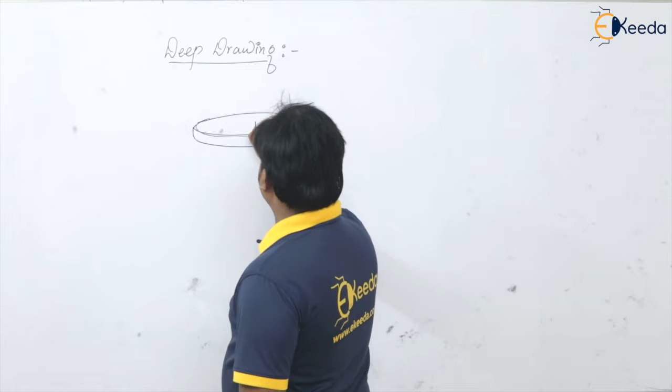It is going to use the sheet, that is the blank, and a punch and die combination to produce these cup shapes or shell like articles. So the given blank is available with us, with thickness T and diameter of the blank, say D.

This blank we are going to deform into the die, to get the cup or shell like article. Suppose we have deformed it up to this point, so you got here. Of course you are going to use the punch and die combination, so this is the punch and this is the die.

So here we are going to produce a cup or shell of diameter D and height h. So simply you can observe here, you are going to get a cup or shell like article.

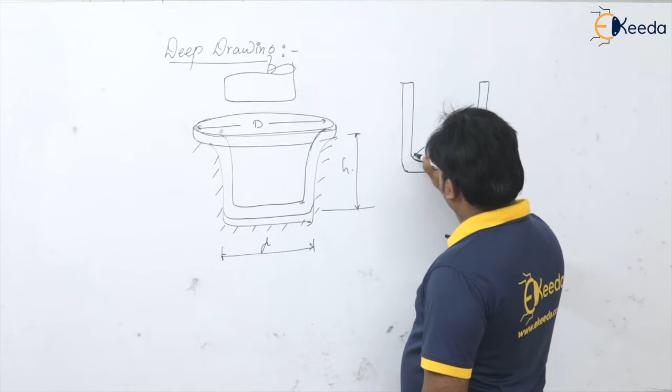Of course, this is the corner radius small r, this is the diameter that you are going to produce, and this is the height of the cup. Corner radius is put there to avoid cracks or failure at the corners because of stress concentration. So this is the cup of diameter D, with sheet thickness T in millimeters.

So this is the deep drawing operation, we are going to produce a cup. Now whenever, in the deep drawing operation, the height of the cup is more than half of the diameter of the cup. That is, h will be greater than d by 2.

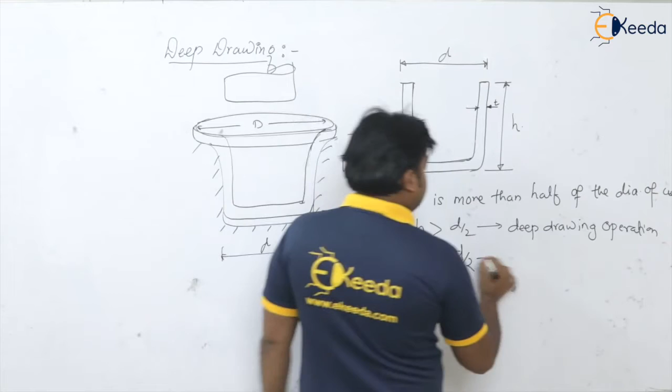When this h is greater than d by 2, it is known as the deep drawing operation. And when the obtained height of the cup is less than or equal to half of the diameter, it is called the shallow drawing operation.

So we are talking about deep drawing, so definitely the h by d ratio will be more than half, that is, the height of the cup will be more than half of the diameter of the cup. So this is the deep drawing operation.

Now this is not the cutting operation. Please remember, even though we talk about sheet metal, shearing is going to happen there, but in deep drawing operation we are not going to cut the material. So shearing is definitely not there. So what is there then?

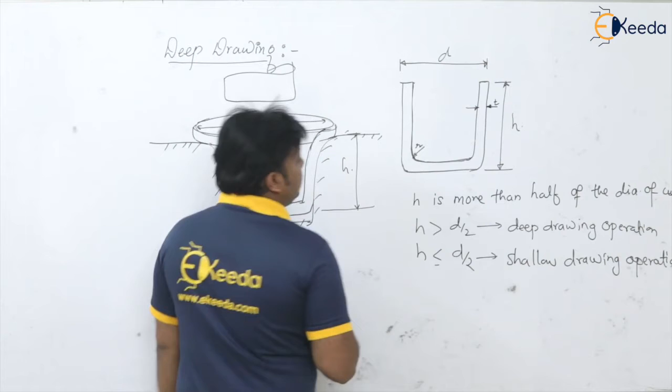The deformation, isn't it? So the stress induced in this material in the deep drawing operation is greater than the yield strength of the material but less than the ultimate strength of the material. Please remember, here we are getting deformation, not the cutting action.

Now the very important thing in this deep drawing operation for designers is to determine the size of the blank required to produce the required height and diameter of the cup. So the blank size calculation is very important, and this can be done mathematically, graphically, by using volume or surface area, to find out the blank size required to make the cup of diameter small d and height h.

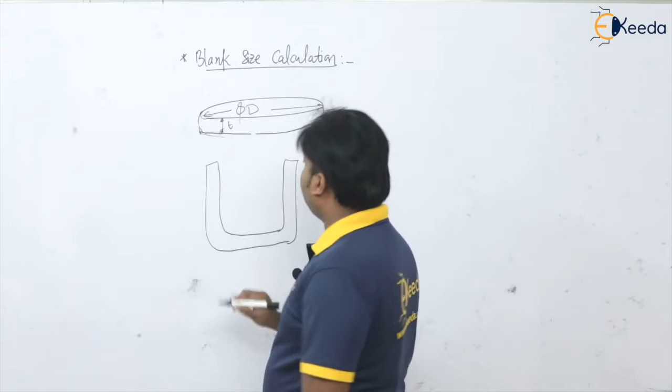So if I say that the blank which I have taken for the operation is of thickness t and diameter d, so d is the blank diameter and t is the thickness of this blank. So from this blank what are we going to produce? We are going to produce this cup of diameter d and height h.

Now for that, what can we do? There are various techniques to get this blank size, by volume, by graphical method, so many methods, but here we are using the surface area method, so that the one side surface area of the blank is equal to the one side surface area of the product, and our product is what?

We are going to get the surface area of the cup, one side. If you look from one side, it is nothing but the cross section of the blank. It looks like a circle, so that's pi by 4 capital D square, where D is our diameter of the blank. This is the very important thing we are going to find out: the blank diameter. So pi by 4 D square is equal to one side surface area of the cup.

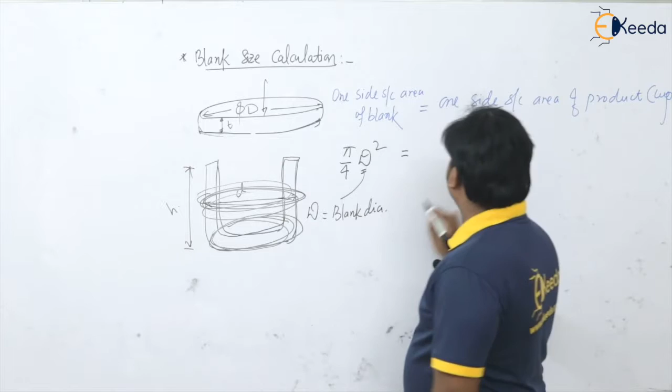One side surface area of the cup: you get the surface of the cylinder, and at the base you get the circular cross section. If you look from the top, at the base this is the circle, and this face is pi dh. So pi by 4 small d square plus pi dh is the one side surface area of the cup, and we can get the value for d.

Pi gets cancelled, 4 gets cancelled, get multiplied this side. So d square equals small d square plus 4 times small d into small h. So what is d? It is nothing but the square root of d square plus 4 times dh.

This is the formula for the blank diameter, this is the blank size we are interested in. Very important, many times this question is asked. Please remember the formula: blank size diameter is equal to root of d square plus 4dh.

Now we have to see the D by R ratio, where D is our diameter and R is the corner radius. When D by R is greater than 20, this is the formula to use.

Now when D by R ranges from 15 to 20, what do we do? We have to minus half of the corner radius from the obtained blank size, and this is the correct answer, when the D by R ratio ranges from 15 to 20.

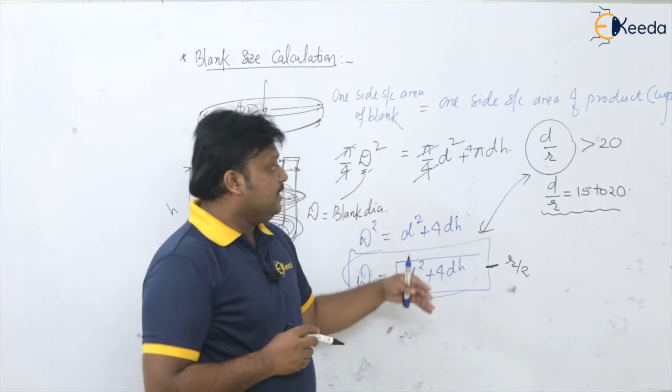Let's say the diameter is 40 millimeter and R is 0.4 millimeter. You will check the D by R ratio first. If it is more than 20, you simply use this formula. If D by R ratio ranges from 15 to 20, you minus half of the corner radius from this, and you will get the correct value.

Now when D by R is from 10 to 15, what you will do is minus the corner radius from this D square plus 4DH. Please remember, you will directly minus the corner radius to get the correct answer.

Now what happens if D by R ratio is less than 10? In that case, you can simply go for total surface area of the product and total surface area of the blank. We had taken only one side surface area before, but now you equate the total surface area of the blank to the total surface area of the product or cup, and you will be able to find out the value for D.

Please remember these three conditions: D by R greater than 20, D by R in the range of 15 to 20, and D by R in the range of 10 to 15. This formula for blank size is very important.

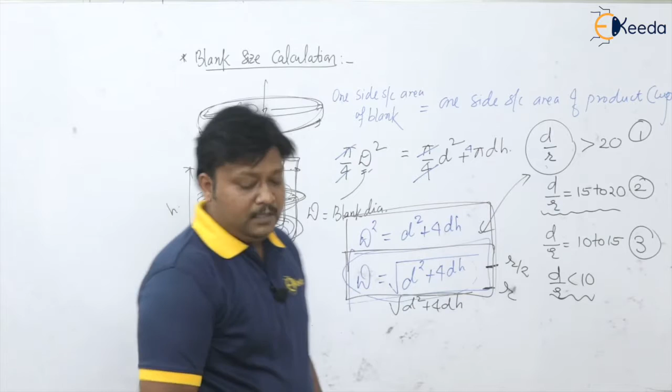So for this cup, calculate the blank size. We know that one side surface area of the blank is equal to one side surface area of the cup. So one side surface area of blank is always available like this, with diameter D and thickness T.

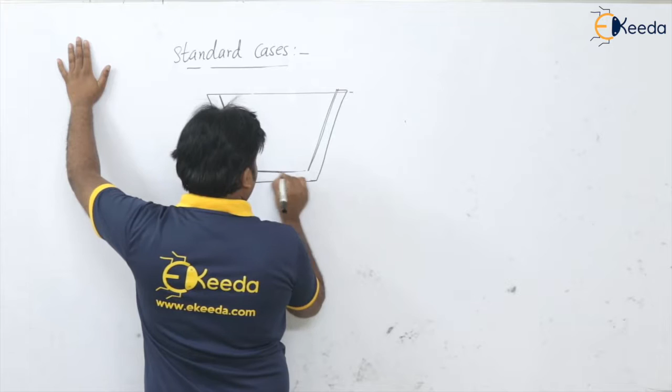Say this is H, this is D1 and this is D2. V-shaped cup. V-shaped cup is going to be analyzed here for the blank size calculation. So sometimes this H, or sometimes this angle theta, is given to you, this angle theta. You can get the value for H here.

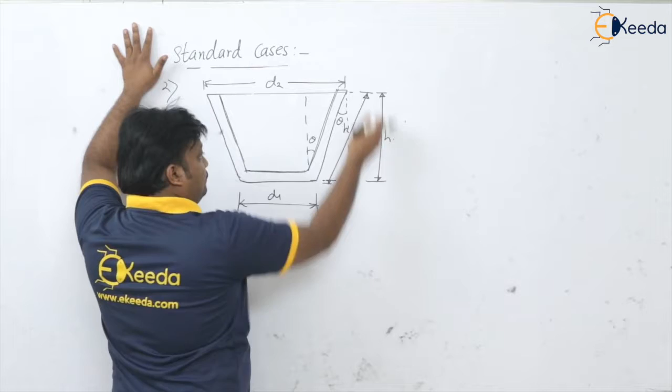So it is not necessary that there should be this H or that H. Whatever height is given to you, you can take the height there. No issue. If slant height is given, take it as slant height. If angle is given, calculate the height. You will have no issue for that. Actually, you can take any.

So here, what is the blank size? One side surface area of blank is pi by 4 d square. For this, at the bottom it is circular, so pi by 4 d1 square plus here pi d average into h. Pi d average into h, please remember this. So this pi by 4 d1 square plus pi times d average, what is that? This is d1 plus d2 divided by 2, into h.

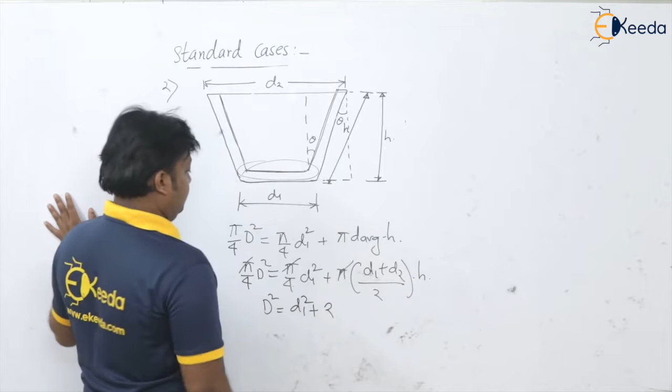This is a slant height or this height, any height you can directly take, no issue. So this is pi by 4 d square. Pi gets cancelled, 4 comes here. So it will be d square is equal to d1 square plus 2 times, 4 comes here, this 4 by 2 is 2, times d1 plus d2 into h. So what is d? It is equal to root of d1 square plus 2 times d1 plus d2 into h.

So this is the diameter of the blank for producing this V-shaped cup. Again, if corner radius is given, then only you can go for the consideration that I already told you. If not, no issue.

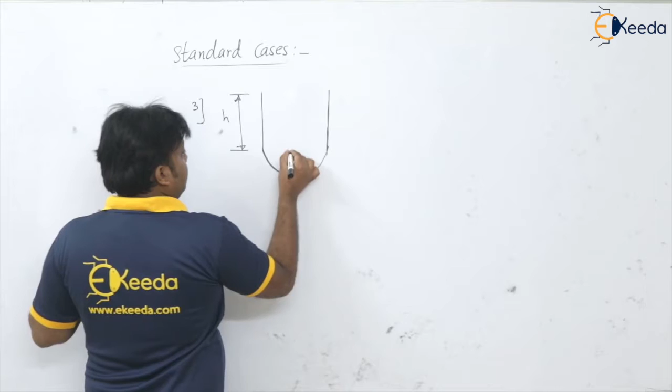Now take the third case, after this V-shaped cup, that is we are having the cup having the hemisphere at the bottom, or the spherical shape at the bottom. So say this is the height h, this is nothing but say r, which is equal to d by 2. For this shaped cup, if you want to find out the blank size, how will you find out?

The one side surface area of the blank, pi by 4 d square, is equal to one side pi d h plus at the sphere, that is half spherical. So what is half spherical surface area? That is 2 times, or 4 pi r square divided by 2. This is nothing but pi d h plus 2 pi, this r can be written as d square by, r is d by 2, that is 4. So we'll get pi d h plus pi d square by 2, that is equal to pi by 4 d square.

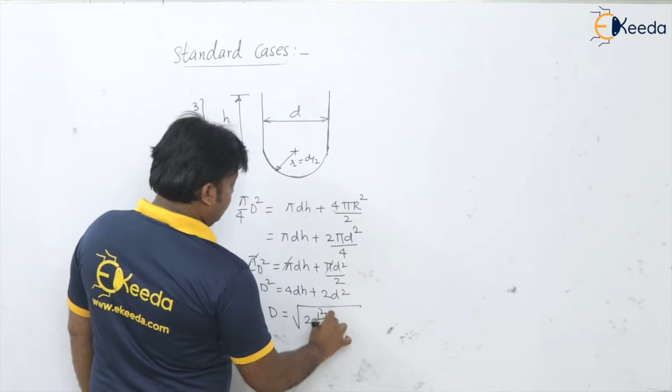So pi gets cancelled, so d square is equal to 4dh plus 2d square. So d is equal to under root of 2d square plus 4dh. Here no need of having this d by r ratio, as this is a radius, spherical shape is there, so no need of any corner radius. So the blank size you are getting in case of the spherical bottom of the cup is d equal to under root of 2d square plus 4d into h.

Now if I take the fourth case, as the hemispherical cup is there, say of radius r, or you can have the diameter d.

Okay, so how can you calculate the blank size for the given cup? Please try: one side surface area of the blank from where it's going to be produced is pi by 4 d square, that is common. It is nothing but one side surface area of the sphere, which is 4 pi r square divided by 2.

That is 2 pi r square, equal to pi by 4 d square. Pi gets cancelled, so d square is equal to 4 into 2, that's 8 r square. So d is equal to under root of 8 r. So root 8, how can you write? This is 4 multiplied by 2 into r, which is equal to 2 root 2 times r, that is the size of the blank for producing this hemispherical cup.

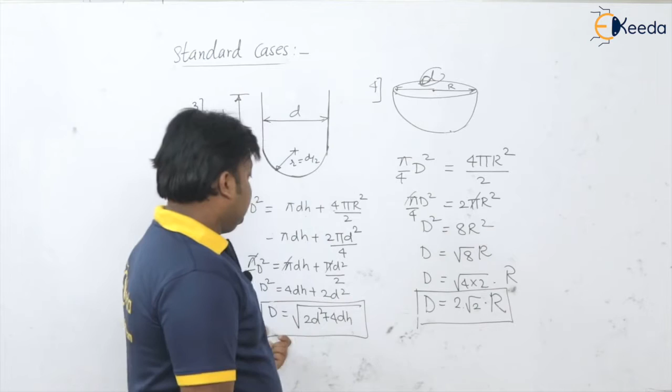So you just have to equate the one side surface area of the blank with the one side surface area of the product or cup. This is a very important thing in the deep drawing operation, the blank size calculation. Many times they ask questions on this blank size calculation.

Now students, let us find out the load or force calculation in the deep drawing operation. Basically in deep drawing we use the punch and die combination for doing this operation. Talking about the clearance between punch and die, since no cutting or shearing happens here, we provide the clearance equal to the thickness of the sheet. So that's the clearance.

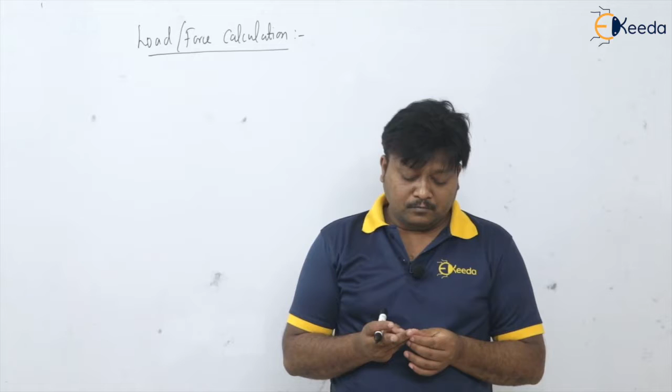Now talking about the loads in deep drawing, it is always better to do this operation in a number of stages. Why is that so? Suppose you go for only a single pass deep drawing operation, the average stresses induced are just equal to the ultimate strength of the material, and there's a strong chance that at certain critical sections cracking or failure will occur. That's why we always try to have the deep drawing operation in a number of stages, also called draws, strokes, or blows. You can use any word: stroke, blow, draw, step, pass.

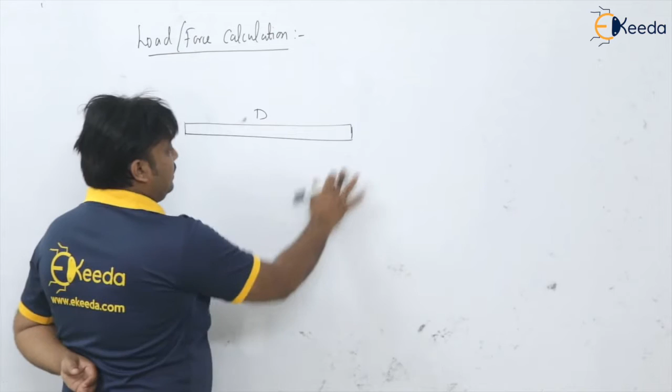Suppose this is the original blank with diameter d, undergoing deformation to form a cup. Say the blank diameter is 120 millimeter, and from that I need to produce a cup of diameter say 40 mm, whatever the height. But I'm not going to have this 120 millimeter blank directly converted into the 40 mm cup diameter. So how can I achieve that? I will have a number of passes for that.

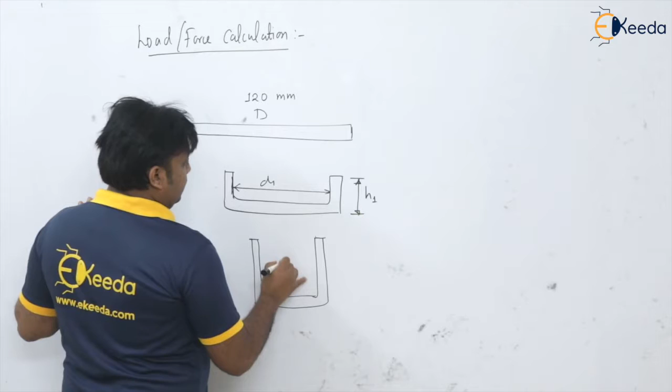So say first pass, I will go for this much reduction in the diameter, and at the first draw my diameter is d1, and the height achieved is h1. Now again I will have the subsequent reductions, the diameter further reduces and the height increases. So this is diameter d2, and the height in this pass is h2.

So every time what I am checking is whether the obtained diameter is less than or equal to the required one. Once it becomes equal to the required diameter, I will stop the reduction. So in a number of stages, say pass 1, pass 2, pass 3, I get the required height or diameter less than or equal to the required one. Say at the third stage I got the required height h and the required diameter for the cup.

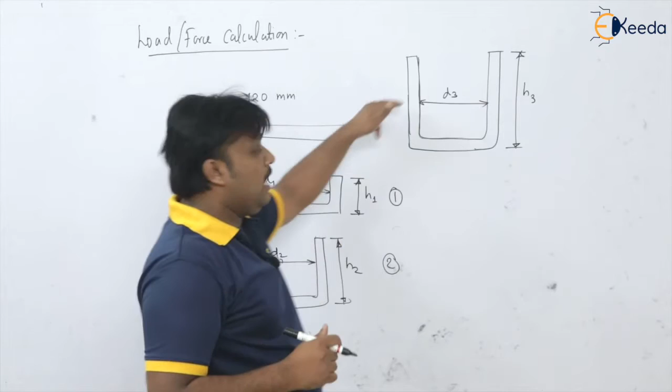So like that we are going to have a number of passes, and the force is also going to be calculated in the number of stages. But let us see how to calculate this force for the deep drawing operation.

It is simple: the cross sectional area multiplied by the yield strength of the material. We get the force, indicated by P, in the deep drawing operation as P equals pi d t sigma y, times bracket (capital D upon small d) minus C, in Newtons.

Here small d is the diameter that you want for the cup. Suppose this is a cup, I want this diameter d and height h from a given blank. So d is this diameter, small d is the diameter that is required, capital D is our blank size. Do you know how to calculate this blank size? The general equation is square root of (d squared plus 4 d h).

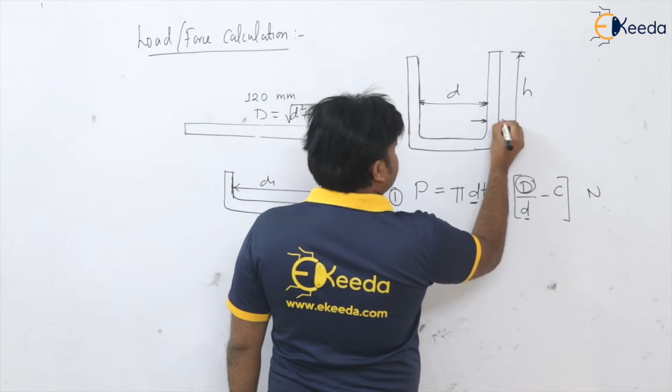So this is how we can write the load formula for the deep drawing operation, where T is the thickness of the sheet, and sigma y is the yield strength of the material. Please remember this is the yield strength. And what is C? This is the constant to cover the friction and bending of the sheet, generally equal to 0.6 to 0.7.

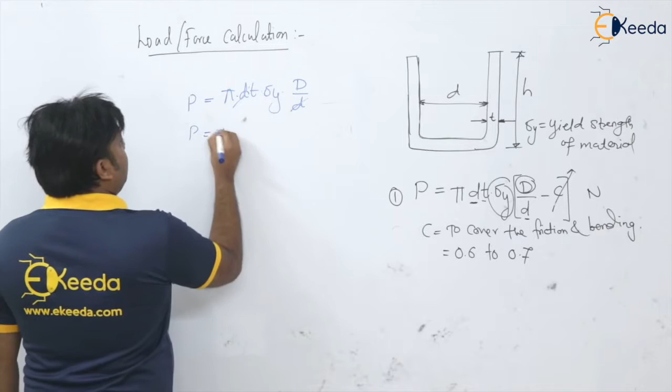Suppose it is not given in the question, you directly neglect it. So what are you remaining with? If C is neglected, you have P equals pi into D into T into sigma y into capital D divided by small d. Now D gets cancelled, so P equals pi d t sigma y, in Newtons. So this is the force in the deep drawing operation.

Now what we discussed is that we never work in a single stroke, so we go for stage-wise operation. So the force will also be stage-wise. Let us say I want to do the operation in a number of strokes.

So definitely for the first stroke or first pass, what will be the force? I can write P1 equals pi d1 (the first draw's diameter) into T into sigma y into bracket (the blank size, which is initially in our hand) divided by the first stage's diameter d1. I am not considering C, it is neglected. So the force in the first stage: d1 gets cancelled, and you get pi capital D T into sigma y.

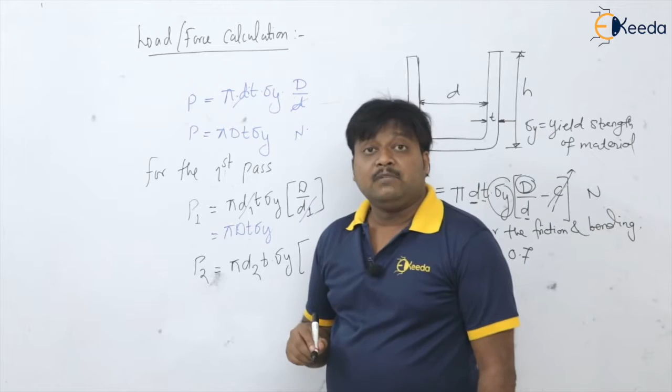Like that, if you want to find the force for the second stage or second pass, which diameter are you getting? Second stage's d2, T times sigma y. Now which diameter are you drawing from? Capital D is no more available; you are available with the first stage's diameter, and this is what you are going to deform further. So this is d1 divided by the second stage's d2, which will be achieved. So d2 gets cancelled, and you are left with pi d1 t sigma y.

Like that, for P3, what will come? Pi, so here d1 came, here what will come? Pi d2 t times sigma. Like that you can go on calculating the force for every stroke, every stage in the deep drawing operation. Please remember this.

Once you are calculating the force, then the work done calculation is much easier. How to calculate the work done? You know work done is force into distance.

So if I ask you to find out the work done at the first stage, first stroke, first pass, how would you do it? It is force into distance. So what is the force of the first draw? P1 into the height of the first draw, H1. So P1 into H1 gives you the work done in the first stage, in Newton meter.

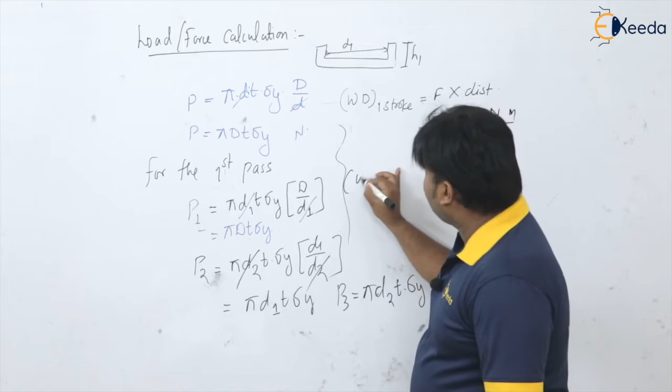Please remember, if I ask you to calculate the work done in the second stage and second stroke, what will it be? In the second stroke, the diameter converts to D2, isn't it? Diameter will be D2 now and height will be H2. So what is the force? P2. Work done equals force into distance. So distance is H2 minus H1. Like that, for the third stage we have P3 into H3 minus H2.

So you can go on calculating the work done also in a number of stages. Okay, so what we see here in the deep drawing operation is force calculation and work done calculation.

Okay, so dear students, after talking about the force or load in the deep drawing operation, now let us discuss about the blank holding force. So basically this blank holding force depends upon the tendency of the sheet or plate to get lifted.

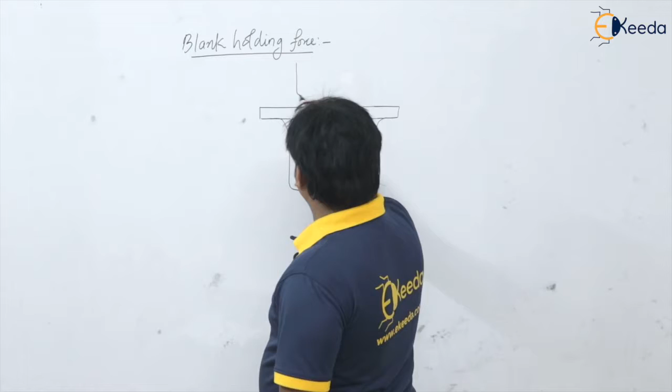So when the force is applied by the punch on the sheet, what happens? The sheet tries to lift in the upward direction. So this is the sheet, and this is our die. When the force is applied by this punch, what is going to happen? This sheet is going to lift in the upward direction, and this will lead to the wrinkling tendency.

Wrinkling tendency - actually what is wrinkling? Wrinkling is nothing but the foldings produced on the flange portion of the cup, like this. So your cup will look like this. So this is actually wrinkling - the foldings on the flange portion of the cup. These are the wrinkles, and this tendency is called wrinkling tendency.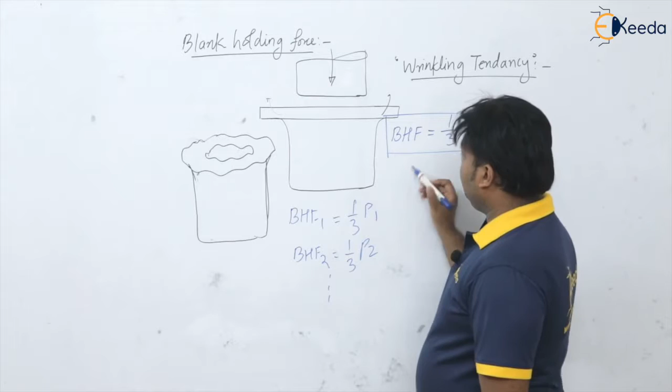Now to avoid this lifting of the plate or sheet, we use the blank holding force - these are spring loaded plates we put here. These are called strippers. They apply this force onto the plate so that the lifting can be avoided. So by using the spring loaded stripper, these are used to apply the blank holding force.

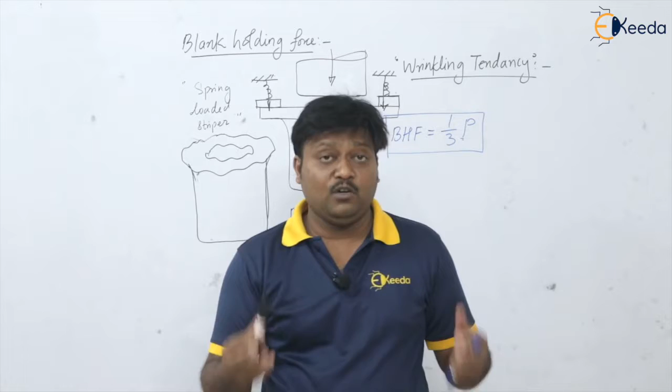Now see, if the blank holding force gets maximum, what will happen? Why is it only 1/3 of the load in the deep drawing operation? Definitely if you apply the maximum blank holding force, the thinning of the sheet may happen. And if it is more, it can lead to failure or fracture. That is the reason why we keep this blank holding force in limit, providing only 1/3 of the load in the deep drawing operation. Otherwise thinning will occur and the sheet is going to fail. Okay, so this is the blank holding force.

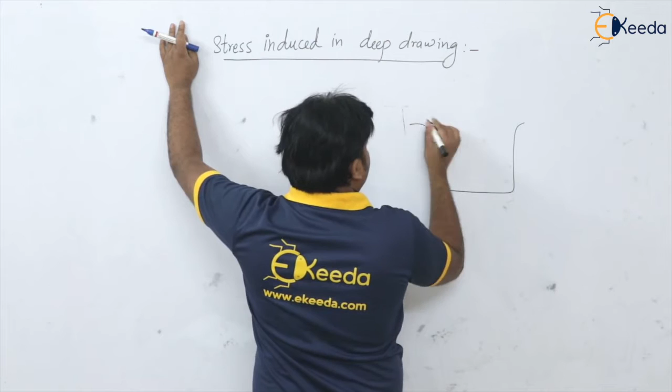Now let us consider the stress induced in the deep drawing operation. So now we have calculated the force. Now how to calculate the stress - and of course the stress can also be calculated in every stroke. So let us say our cup is forming here by the force from this punch, and you know that in the deep drawing operation, the clearance between the punch and die is equal to the thickness of the sheet. This is nothing but the clearance. So once you see from the top, how will it look? If this is the punch diameter, isn't it?

Say this is the outer diameter, that is including the thickness T on each side. If D is the diameter, this is the height of the cup being produced in this die. So the inner diameter will be D minus 2T, since thickness T is removed from each side, and outer diameter is D. So outer diameter here is equal to capital small d, and inner diameter will be D minus 2T.

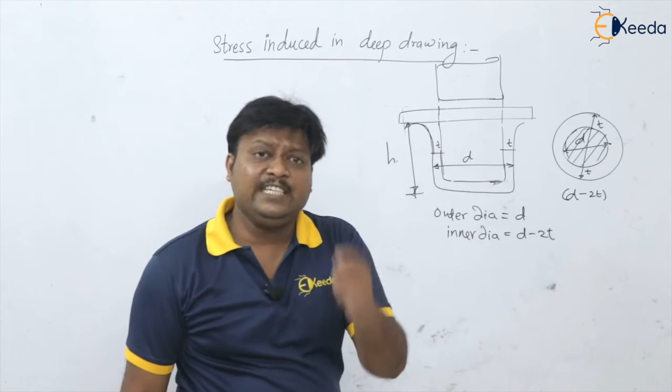Now if you want to find the stress induced in the first pass or first stage, say sigma 1 is the stress induced in the first stage. Sigma is equal to P1 divided by the area in the first stage. We know P1 is calculated as pi d t into sigma y. So sigma 1 equals P1 divided by the area, which is pi by 4 into d1 square minus the inside area, d1 minus 2t whole square.

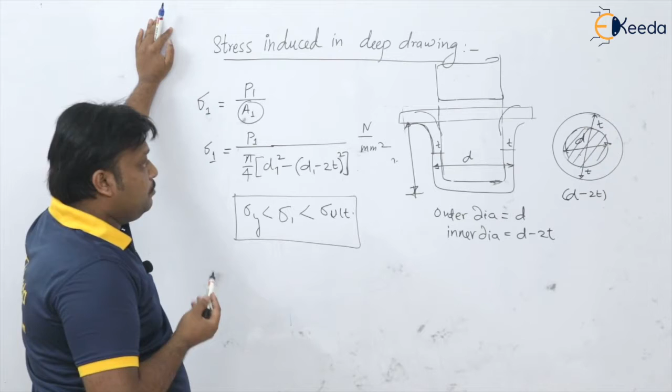So you get this stress in Newton per mm square for the first case. One very important thing is that deformation happens when sigma 1 is greater than the yield strength of the material, and of course less than the ultimate strength of the material. Remember this, because deep drawing is a deformation process where the size and shape is obtained through deformation.

So similarly you can have sigma 2. This is P2 divided by pi by 4 into d2 square minus d2 minus 2t whole square. Like that you will get the stress in the second stage, and you can go on calculating the stress in the respective stage or stroke very easily. So this is the induced stress calculation in the deep drawing operation.

Now in this stress analysis, suppose we have a partially drawn cup. Partially drawn means the process is currently running, and I want the stresses induced in a partially drawn cup. Let us see this. For that I have to draw the partially drawn cup.

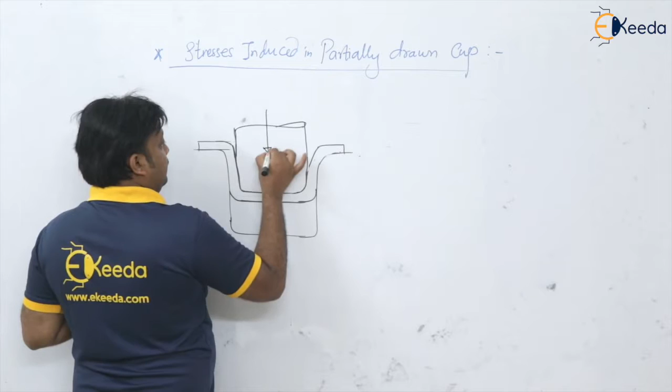Say this is the die, and this is the flange portion on which our blank is rested now. It is partially drawn, that's why I will show it like this, that the operation is in process, and it is applying force P. This is the die, in which the process is progressing for making a cup from a given blank. So this is a partially drawn cup.

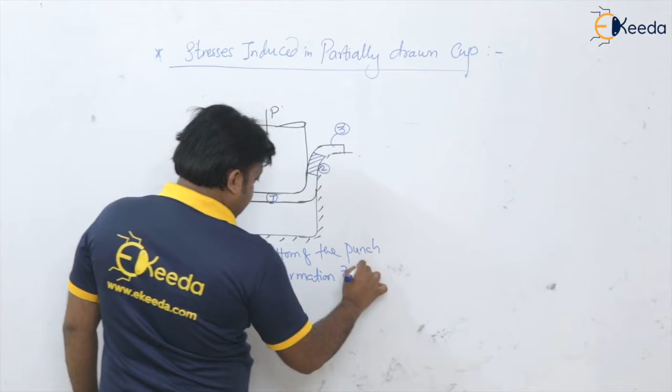So here we are having three zones. This is zone number 1, and for deformation, this is zone number 2, and the flange portion, this is the third zone. So zone number 1 is the bottom of the punch. Zone number 2 is the deformation zone. And zone 3 is the flange portion.

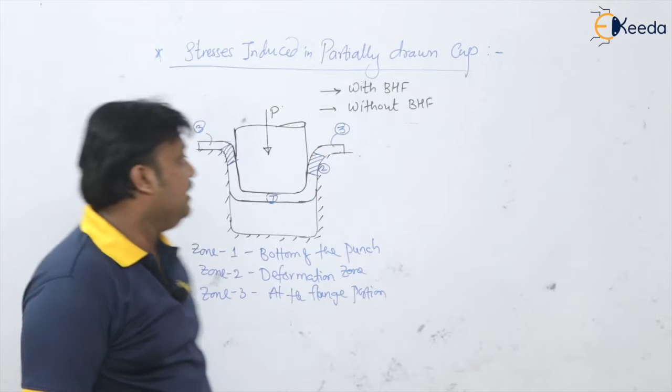So what we are going to see is the stresses induced in these three zones in the partially drawn cup, and very importantly, by considering two conditions: one with BHF and one without BHF. So for these two conditions, we are going to see in each zone what kind of stresses are going to induce in the partially drawn cup. This is very important - many questions are framed on this subtopic, stresses induced in partially drawn cup.

So let us see, we have the first zone - which zone is it? Bottom of the punch. So tell me which kind of stresses are going to induce, here with BHF and without BHF. Okay, so that we are going to see.

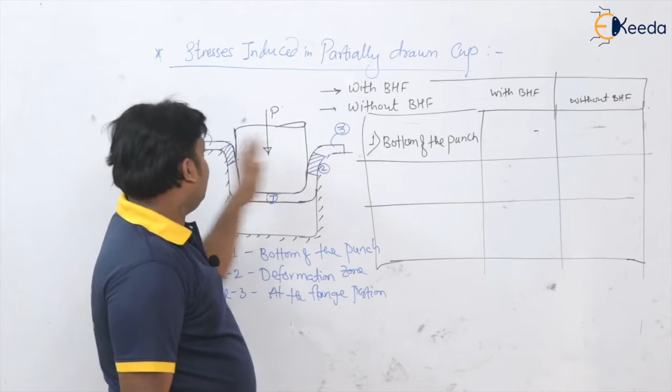Now see at the bottom of the punch. If you are not applying any blank holding force (BHF), the punch is simply taking the sheet down into the die. So actually there are no stresses.

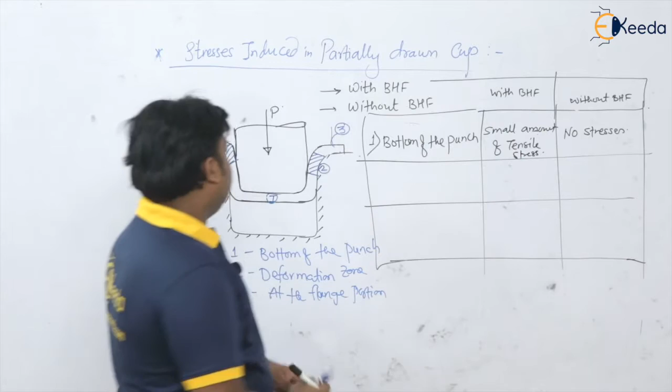Without BHF, at the bottom of the punch there are no stresses. Even if you apply the blank holding force on the flange, there will be stresses, but a very small amount of tensile stress only. So with BHF, a little amount of tensile stress will be at the bottom of the punch.

Now come to the second zone, the deformation zone. The force or stress induced in this zone is responsible for the change in shape, and it is responsible for deformation. So in this deformation zone, the shape is going to change.

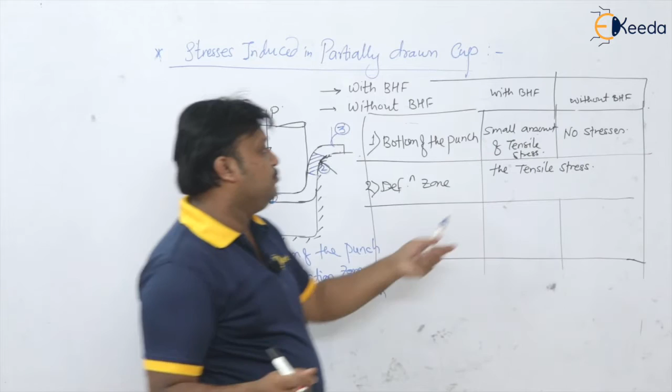That's why with or without BHF, there is no issue. What kind of stress will be there? With or without BHF, pure tensile stress only. However, if you look at the corners, there is a compressive stress, but it is very small in amount compared to the pure tensile, so we are neglecting it.

So here I write in brackets: at corners, compressive stress is there, but negligible, so that's why I am neglecting it. So pure tensile actually in the deformation zone. Please remember, this is very important: in the second zone, whether you apply BHF or not, there will always be pure tensile stress produced.

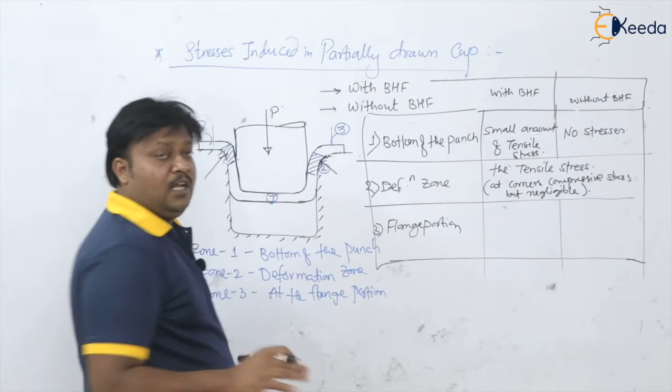Now come to the flange portion. When you are not having BHF at the flange portion, versus when you are having BHF, what is the material going to have? Deformation, because of the tensile stress. So only tensile, with the BHF, tensile stress only.

But without BHF, what is going to happen? There is a flow of material radially, and they are going to produce foldings, they are going to produce wrinkles. So if you look at the kind of stresses induced at this third zone, the flange portion, these are two directional tensile and compressive in the third direction.

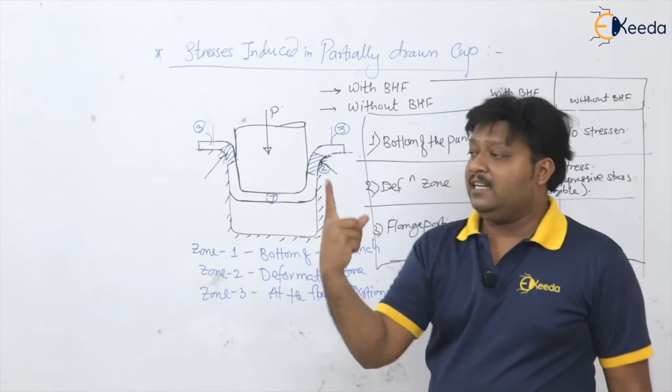So with BHF, only the tensile stresses are generated in the flange portion as material flows inside the die. But if you are not using any BHF, it will simply be lifted outwards. So: two directional tensile stress and compressive in the third direction.

So these are the kinds of stresses which are produced in the partially drawn cup in various zones: the bottom of the punch, the deformation zone, and the flange portion. So this is about the stresses.

Now in this video we are going to see the number of draws, the number of passes, and the calculation for this. Many times I use the words pass, draw, blow, stroke - these all mean redraws. So how to calculate this? Let us see the number of draws in deep drawing operation.

For calculating the number of draws, there are two techniques. Technique number one is the draw ratio method - very easy. What is the draw ratio method? The draw ratio is equal to the diameter before drawing divided by the diameter after drawing.

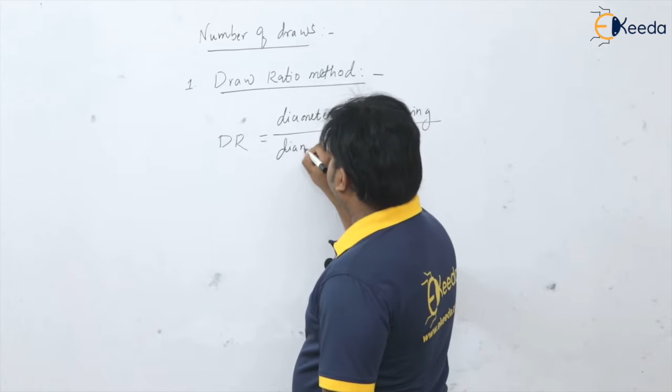Let us say if I want the draw ratio for the first draw. When we start the operation, what do we have? We have the blank, the blank size. Using that blank, we are going to produce the cup. So before drawing we have capital D, the blank diameter, and after drawing we get the cup diameter. So simply, the ratio of diameter before drawing divided by diameter after drawing.

So here D will be replaced by D1 because this is the first draw. Now this draw ratio actually ranges from 1.6 to 2.3. Please remember, these are the limiting draw ratios, LDR - limiting draw ratio ranges from 1.6 to 2.3.

If in the question they are asking for the calculation of number of draws and they have not mentioned anything about the draw ratio or limiting draw ratio, you just simply consider the draw ratio is equal to 2. Please remember this, it's very important - whenever no data is given for the draw ratio, you can take it as 2.

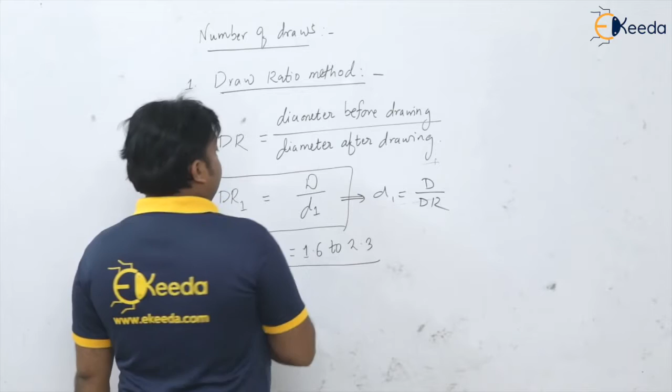So like that you go on calculating the number of draws to get the required size of cup. Say the diameter you get from this first draw, D1, is equal to D divided by the draw ratio. But still it is greater than the required diameter, the required cup diameter.

So for the next draw, for the subsequent draw, you will get D2 equal to D1 divided by the draw ratio. If the same draw ratio is used in every stage, this dr will be same everywhere. If the draw ratio changes at particular stages, you'll have dr2. If this is greater than the required diameter, you go for the third draw, that is d2 divided by draw ratio at the third stage. Once it is less than or equal to the required diameter, you stop there. So there will be 3 stages, and the deep drawing operation can be done in these 3 stages. Like that we can find out the number of draws.

Let me take one example. Suppose a cup of diameter 15 mm is required and height of the cup required is 60 mm. The question is to calculate the number of draws required to do this drawing operation. First of all we require the blank size, which is very important. Blank size is simply under root d square plus 4dh.

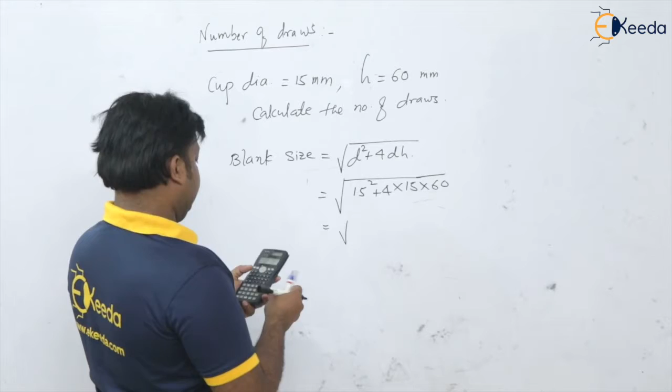So diameter of the cup is 15, so 15 square plus 4 times 15 times 60. If we solve it, 60 square plus 225, under root, the answer is around 61.84 millimeter. So this is the available blank size with you, and this blank size you are going to draw into the required cup diameter and height.

Here nothing is mentioned about draw ratio, so simply we can take it as draw ratio. How much are we going to take? It is 2. So let us write the draw ratio equal to the diameter before drawing, that is d divided by d1. So d1 will be 61.84 divided by the draw ratio, which is 2. So d1 will be 61.84 divided by 2, that is 30.92.

What diameter do you need? 15 millimeter. What did we get in the first stage? 30.9, which is greater than 15. So again you have to go for the second pass.

What will you get in the second pass? This 30.92 divided by 2. How much is it? Divided by 2, it is 15.46, which is again greater than 15.

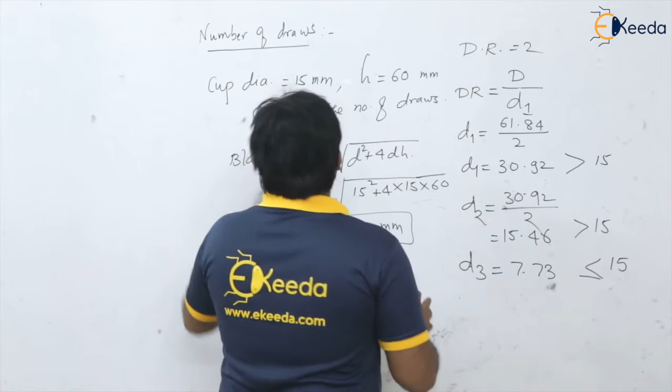So how many stages, or how many draws, are required? The question was the same: calculate the number of draws. Draw number 1, this is the second, and in the third draw the operation gets complete. You reach the 15 mm diameter. So the answer is 3 draws. How many draws were needed? 3 draws were needed. Like that you have to solve the questions.

Now the other technique to calculate the number of draws is the draw reduction ratio technique or method, known as DRR. So how to calculate DRR? DRR is equal to D minus d divided by capital D into 100. So the initial diameter minus the diameter in the respective stage, divided by the initial or original diameter, gives you the draw reduction ratio. Very simple. This is like a percentage reduction.

So if I want to write for DRR1, the draw reduction ratio, it will be D minus D1 divided by D, where D is the blank size and D1 is the diameter I am going to get in the first stage, into 100, so it is in percentage. The draw reduction ratio in the first stage is about 45 to 50%. Please remember this. So definitely how much draw ratio can you get in the first stage? 45 to 50%. That is the draw reduction ratio we are getting here.

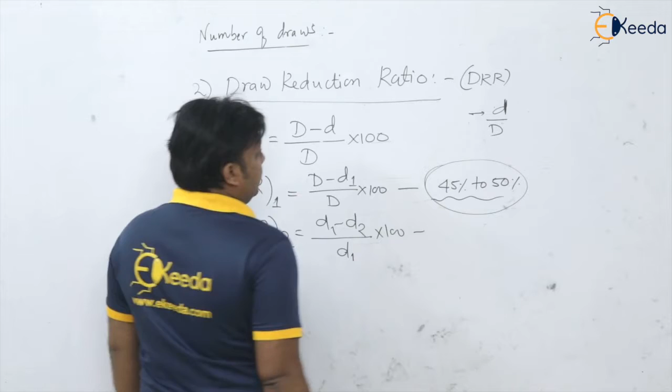Suppose directly from the given data you have the value of capital small d, that is the required diameter, divided by blank diameter. If this ratio is more than say 50%, you have to go for this reduction technique in the number of stages. So for the first reduction you get about 45 to 50%. Similarly, the draw reduction ratio in the second draw is available diameter D1 minus diameter D2, divided by D1 into 100. Here you get 30 to 35% reduction in the second draw.

Now when you go for the third or fourth draw, it is very important to remove the material and enhance the ductility by the annealing operation, so that you can get further deformation and reduction in the deep drawing operation. Before doing the third or fourth draw, you have to enhance the ductility so it can be easily drawn by the annealing process. This is not so important, but for your information I am telling this.

So for the third draw, it is D2 minus D3 divided by D2 into 100, giving around 20 to 25% reduction. And for the last draw, DRR 4 and above, maximum reduction you can get is D3 minus D4 divided by D3 into 100, which will be nearly about 16%. So easily we can calculate the number of draws using this draw reduction ratio technique.

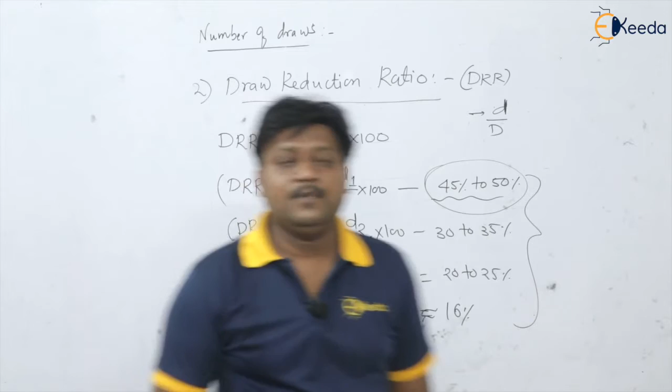So let us discuss one example where we are going to consider this draw reduction ratio technique. Students, let us discuss this example.

The question is: a cup of 50 mm diameter and 75 mm height is to be drawn from a 1.5 mm thick steel sheet of deep drawn quality with tensile strength 300 megapascal. Neglecting the corner radius, calculate number 1, the blank size, and the force and energy required for the first draw.

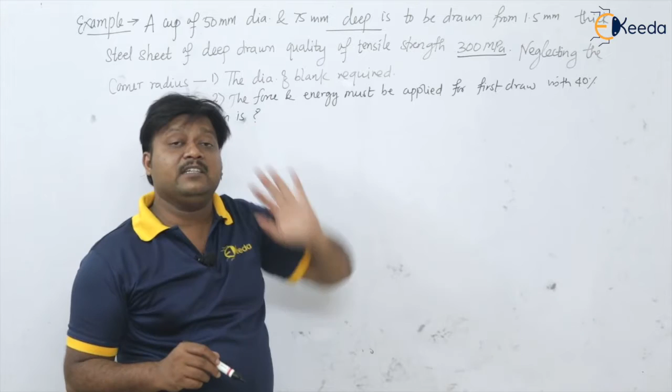In the first draw, 40% reduction is given. So, diameter of cup is 50 millimeter, height of the cup is 75 millimeter, and sigma tensile strength is given. But we want sigma y here. Please remember, many times in deep drawing questions they give us the ultimate strength or tensile strength of the sheet, but we want sigma y, the yield strength, which we generally take as half of the tensile strength.

So here sigma y will be 300 divided by 2, which is 150 megapascal. Then we can go for the calculation. Draw reduction ratio in the first stage is 40%. Now what is the blank size? Very easy - corner radius is not given, so directly blank size equals under root of d square plus 4dh. So diameter: 50 square plus 4 times 50 times 75.

You will get this answer for D as 132.3 millimeter. So the first part of the question is clear, a very simple calculation of the blank size. So we get the diameter of the blank here. Now they say the first draw reduction is 40%, so let us calculate the force and energy for the first draw. What have they asked for the first draw? Force and energy they have asked.

So the force for the first stage, P1, is equal to pi d1 t into sigma y into bracket capital D by d1 minus c. Since c is not given, it is 0. So d1 gets cancelled, giving pi times capital D times t into sigma y as the force in the first stage. Putting the values, P1 equals pi into 132.3 into thickness 1.5 millimeter into yield strength 150 megapascal. If you calculate, you get 93.5 kilonewton. So this is P1.

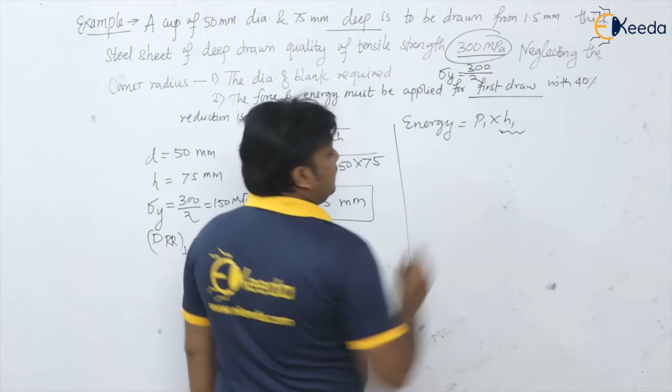Now the force is also calculated. Now energy in the first draw is P1 into H1. Now H1 is important here. So what is the height in the first draw? To calculate this height in the first draw, we know that D is equal to under root of, now writing for the first draw, D1 square plus 4 D1 H1.

Now what is the blank size for the first draw? To calculate H1 we also need this D1. So how much reduction is given for the first draw? The draw reduction ratio for the first draw is D minus D1 divided by D into 100. It is given as 40%, that is 0.40 equals capital D 132.3 minus D1 divided by 132.3. So calculate for D1, it will be how much?

132.3 into 0.40, and 132.3 minus this answer, you get 79.38. So D1 will be 79.38 millimeter.

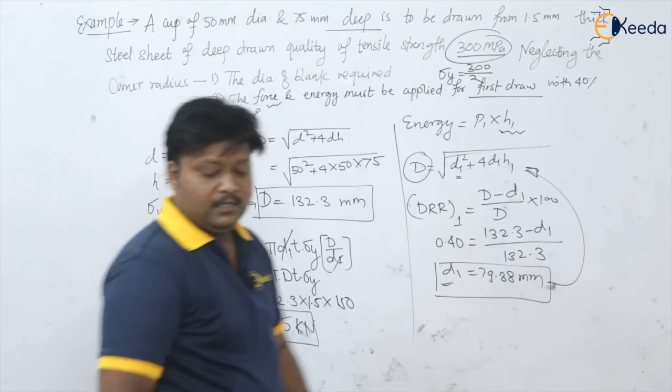Okay, now use this D1 value in this equation, you can able to get the value for H1, that is the height of the cup in first draw, because you want to find out the energy in the first draw, that is P1 into H1. So what is value of D? 132.3 is equal to under root of D1, 79.88 whole square plus 4 into 79.88 into H1.

Dear students, please calculate for H1. I will write directly here. I am having this value as 32.3 millimeter. Okay, so this is H1.

Now very nicely you can calculate the energy in the first draw, that is work done or energy, same, which is equal to P1 into H1. So P1 was 93.5 kilonewton, so into 10 to the power 3 Newton, into H1, 32.3 millimeter. We have to convert it into meter, that is into 10 to the power minus 3. And if you calculate, you will get the answer nearly equal to 3 kilojoules.

Please check and tell me. So work done or energy in the first draw, how much will you get? 3 kilojoule. So this is the answer. Understood how to solve this?

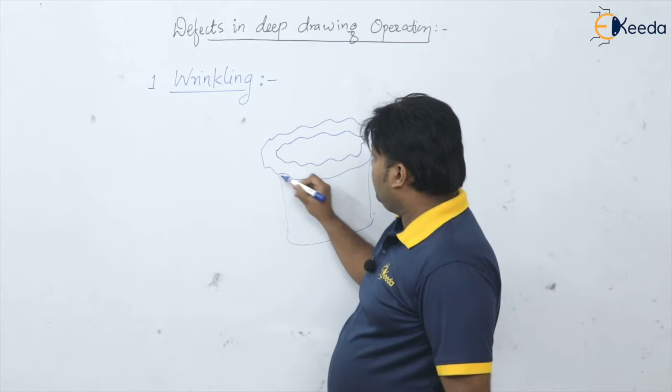Okay, so we are getting these foldings at the flange portion of the cup, which is nothing but the wrinkles. Okay, so this is most common. So again, this is because the material is flowing radially, so we are getting these foldings.

Okay, so the main reason behind production of these wrinkles is basically the insufficient blank holding force. So we have to provide the necessary blank holding force to avoid the lifting of the edges, so that the foldings will not be produced. You can able to eliminate the defect called wrinkling.

So actually the wrinkles which are present on this flange, these are the flange wrinkles. Sometimes what happens, the wrinkles can be extended up to the wall of the cup, and say this is the wall of the cup, and it is now producing wrinkles on the wall of the cup like this. So this is our cup. Okay, so these are known as the wall wrinkles. These are nothing but the flange wrinkles, and these are the wall wrinkles. Okay, so these are the wrinkling.

So the main remedy for this is what? We know that we have to provide the sufficient amount of blank holding force so that the lifting gets avoided and these wrinkles can be eliminated.

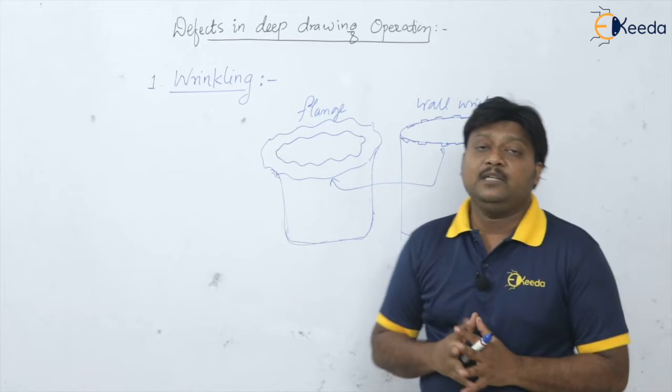Now another remedy to eliminate the wrinkles is that we know that in deep drawing operation, the clearance we have provided is generally equal to the thickness of the sheet. That is clear. Now, but in the deep drawing operation, these wrinkles are caused due to the flow of the material in the radial direction. That's why these foldings are getting produced.

So actually in a deep drawn cup, if you see the cross section, the side walls are becoming thicker than the bottom of the sheet. Okay, so we can do this, and this material is going to flow here in terms of the wrinkle it is going to generate. So what happened, to...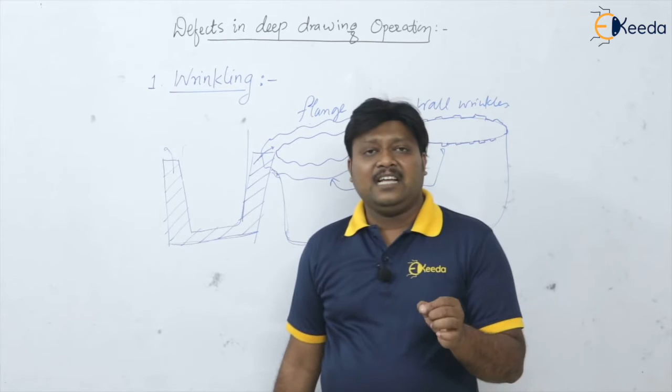Avoid this thickening of the sheet in the side walls of the cup, what we are doing is providing the clearance in the deep drawing operation slightly less than the thickness of the sheet. Okay, that's why if you are keeping the clearance in the deep drawing operation less than the thickness of the sheet, then definitely this material getting squeezed, isn't it, and it will flow uniformly with the pressure so that it can go and equally distribute on the flange portion.

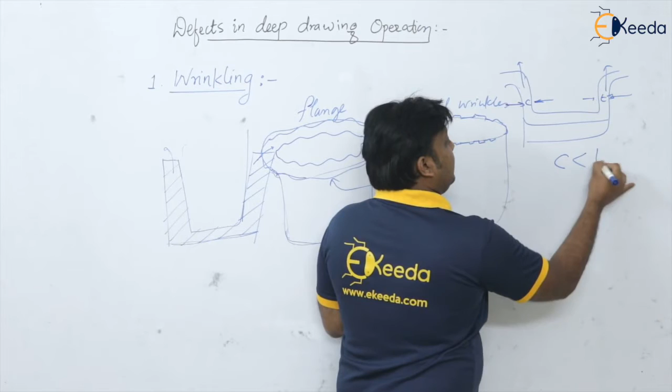So what happened, that action or effect is known as the ironing effect. The ironing effect is where we want to squeeze the material between the punch and die, so that we can eliminate this radial flow which is non-uniform and produces foldings, which are nothing but wrinkles. This effect involves providing a clearance slightly less than the thickness of the plate, unlike in deep drawing where it equals the thickness. That's why the material gets squeezed in this gap, eliminating the wrinkles.

So the first remedy is to have a sufficient amount of blank holding force. On the edges you can provide the blank holding force by using spring loaded strippers. And the second remedy is the ironing effect.

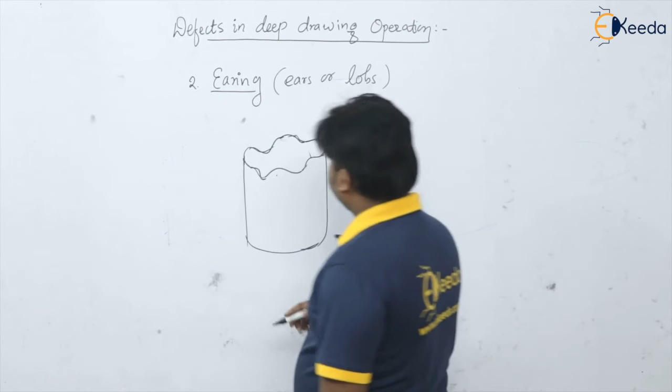Now the next defect in the deep drawing operation is the ear or lobes. Please remember, the first defect is wrinkling, and the second defect we discuss is the earing, or simply the ears or lobes. These get produced on the vertical wall of the cup. So these wrinkles which are present on the vertical wall of the cup are known as the ears.

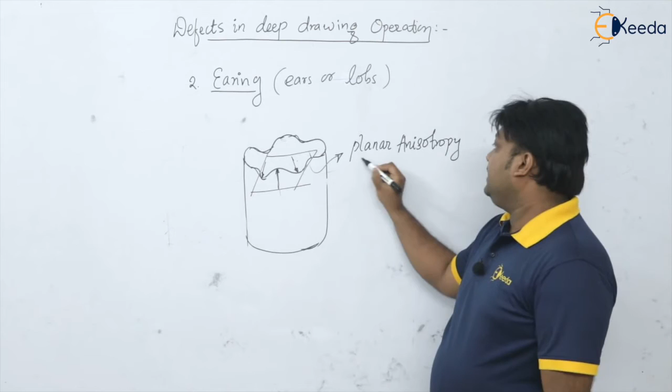The main reason for this earing effect is that the inner part of the ear is subjected to compression, whereas the outer layer is subjected to tension. So in a single plane, we are having different properties: at the inner surface of the ear it is compression, and at the outer surface it is tension. When you observe such different properties at a point in different directions within a single plane, this is nothing but the planar anisotropy of the material, and this is the reason for the production of these ears.

So the ears or lobes are produced because of the planar anisotropy, called the earing defect. Now, how to minimize this earing defect?

Of course, provision of BHF is one remedy, or you can use draw beads. This is the die. You can use this semi-spherical depression onto the flange portion, and this is where the die holds, and this is the punch. These are the draw beads. The diameter of the draw bead is about 13 to 20 millimeters.

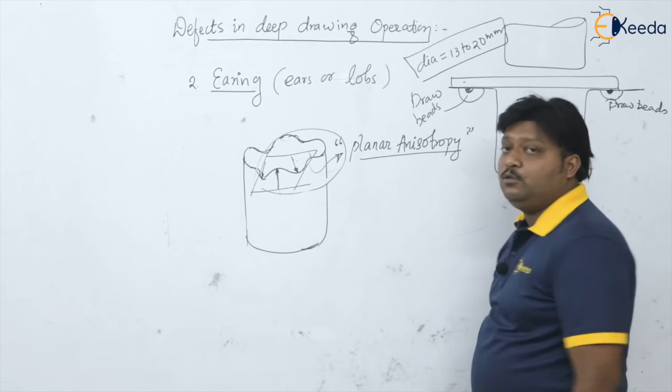But the earing defect cannot get eliminated completely even with the use of draw beads and BHF; it is still present on the cup. That's why we have to use a trimming allowance — it is not entirely in our hands. So ultimately, whatever ears are left after the provision of BHF and draw beads, we simply cut them off to get the required dimension. But since we use this trimming allowance, we have to provide excess size so that it can be cut off after the process, accounting for the trimming allowance.

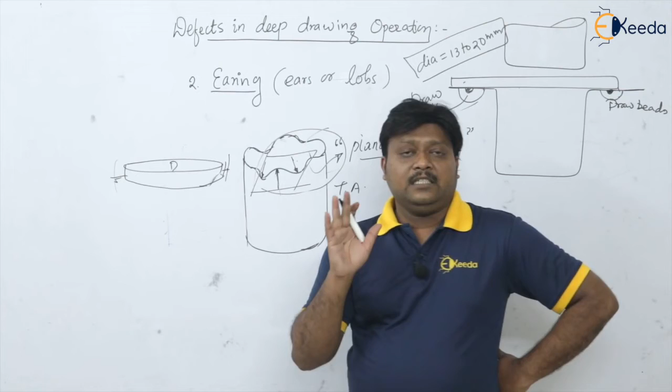And we are finally going to trim this produced diameter to account for the ears. So definitely we have to add some extra diameter onto the blank. At that time, the trimming allowance is given by thumb rule as 3.2 millimeters on 25 millimeters of the cup diameter.

Remember it, how trimming allowance is given as 3.2 mm on 25 millimeter of cup diameter. If it is given radially, you can be asked to find the diameter of the blank by provision of the trimming allowance, that is D total. D total is equal to D, the blank size you calculated, plus 2 times trimming allowance. But the thumb rule says you have to add 3 or 3.2 millimeter for every 25 millimeter of cup diameter, and add that into the capital D.

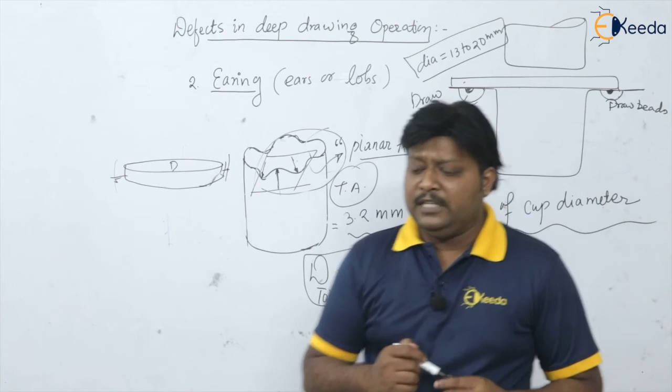Let us take an example so you can understand. Say this is our cup of 48 millimeter diameter and 48 millimeter height, of thickness 1 millimeter. In the numerical, suppose the trimming allowance is 3 millimeter on 25 millimeter of cup diameter. Find the D total, the actual blank size we have to take into account with the trimming allowance.

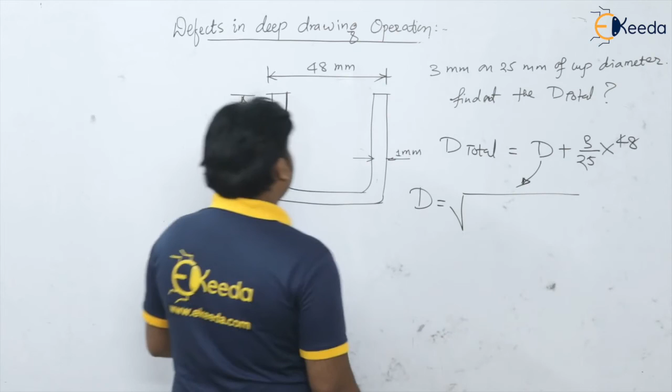So what is D total? D total will be D plus 3 millimeter over 25 mm for the cup diameter, which is 48 millimeter. First calculate the blank size D, which is under root of D square plus 4DH. So diameter 48 square plus 4 times 48, diameter and height also 48. Calculating this, the root of the answer is around 107.33 millimeter.

So D total will be 107.33 plus the value of 48 into 3 divided by 25, which is 5.76. So D total is 107.33 plus 5.76 equals 113.09 millimeter. That is the theoretical blank size, but when you account for the ears also, which are going to be cut by provision of the trimming allowance, this will be the actual diameter you have to put for the blank size. This is how we calculate the actual blank size by provision of the trimming allowance.

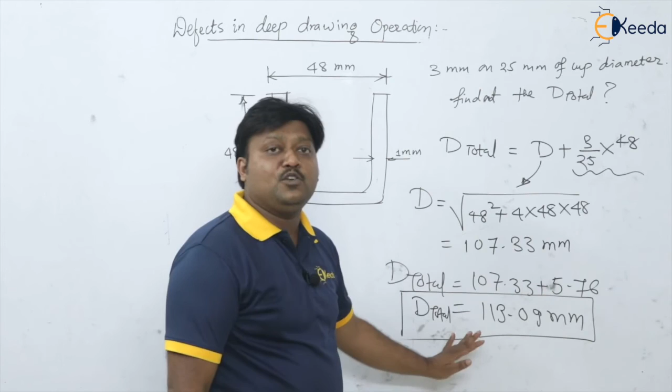Now, the number of ears produced in the deep drawing operation: in the earring defect, the number of ears can be given as 2 to the power n, where n is the integer whose value depends upon the properties of material, friction, bending, and all these conditions. Please remember that the number of ears is given as 2 to the power n.

Suppose in the examination they ask you to calculate the number of ears, and the options are: option A 14, option B 25, option C 30, and option D 32. What will be the answer? It should be 2 to the power something. The answer is only 32. That is 2 by 2 by 2 by 2 by 2: 2, 4, 8, 16, 32, where n here is 5. Only then we get 32. So the number of ears produced is 32.

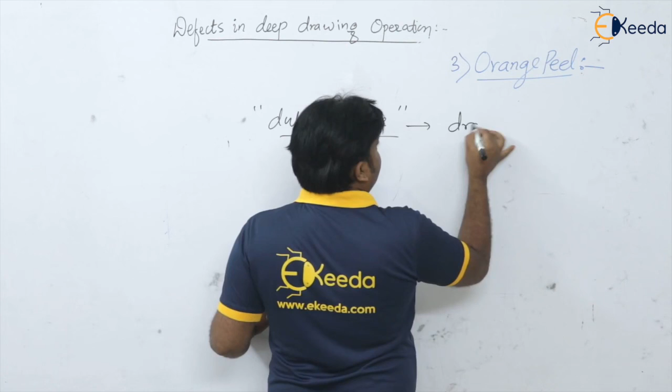This is the second defect, and we have seen the remedy for that. Now the third important defect in the deep drawing operation is the orange peel. This orange peel is a kind of metallurgical defect that is produced in the deep drawn component, where we get a dull surface on the drawn cup. It is because of large grain size. You get a surface like the orange peel surface. This is a metallurgical defect you can get on the drawn cup, the dull surface because of large grain size. That defect is known as the orange peel. So these are the main three defects in the deep drawing operation: wrinkling, earring, and orange peel.